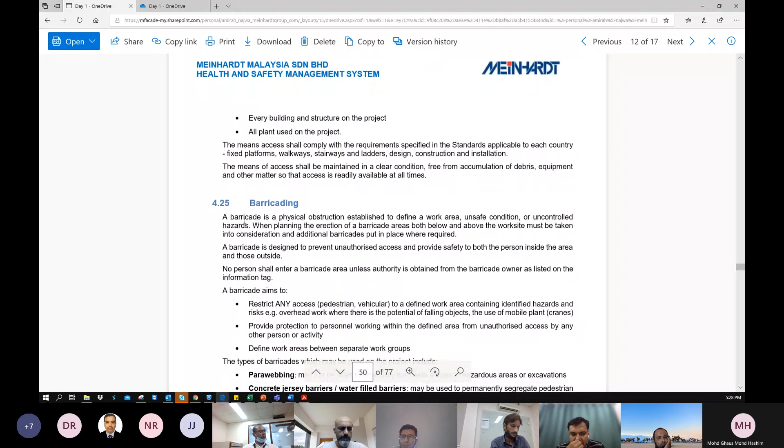Some important things to note. One important thing under the barricading requirement, we have a technical guidance. Maybe you can show this on the bulletin - what is the barricade requirement in Meinhardt?

We discourage use of caution tape. We only use hard barricades in Meinhardt projects. So we expect to see Meinhardt barricade standards followed based on the bulletin that we issued.

I believe we have actually copied the Pakistan team in the recent bulletin. Have you guys witnessed the document a bit? The barricading standards?

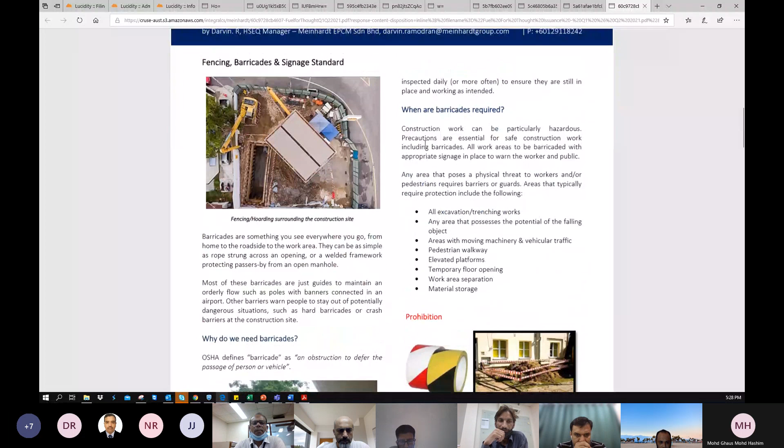I believe you are copied in the email, right, Abid? Yes. So this is the minimum requirement to manage barricades in Meinhardt sites, signages and standards.

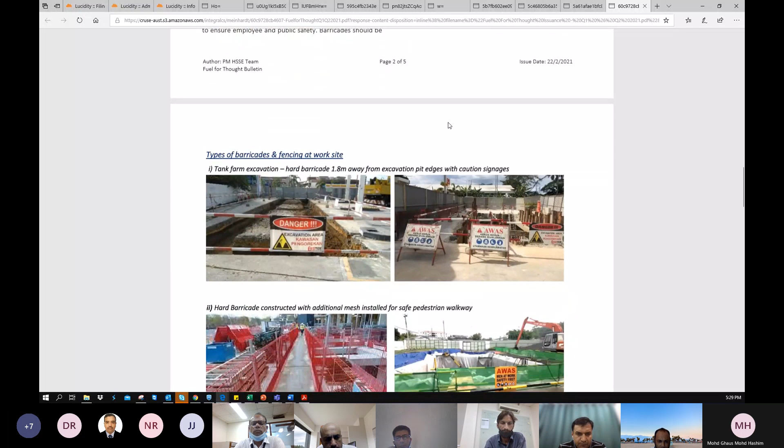So if you see, soft tapes are not allowed in Meinhardt projects, simply because it causes housekeeping issues later on, and this does not prevent unauthorized entry to the area.

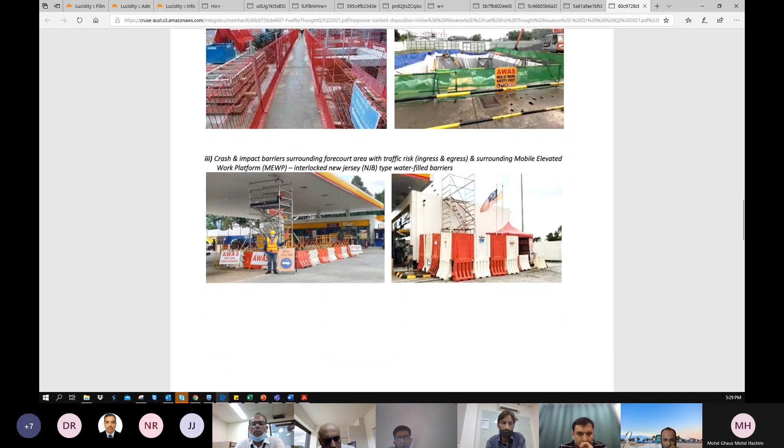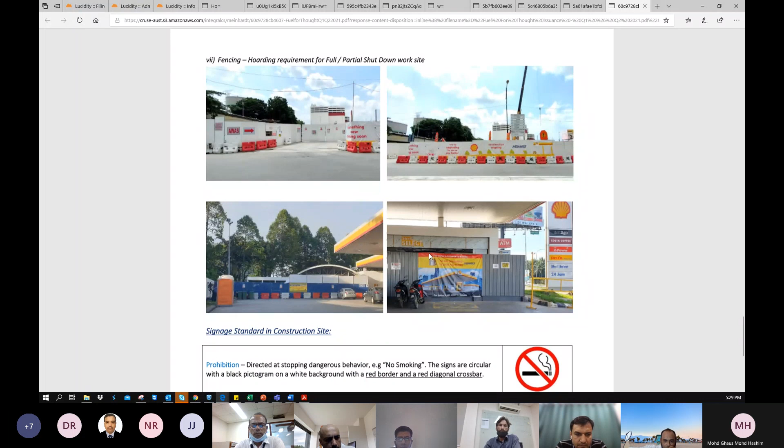The types of barricades cover various excavations, trenching, work area separation, pedestrian walkways, MEWPs (mobile elevated work platforms), crash barriers at ingress locations. In addition, we also have other signage requirements clearly and prominently posted in this standard.

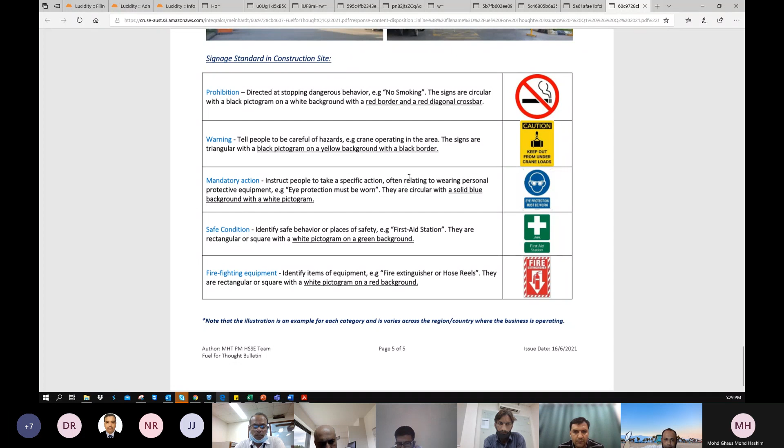So Abid and the team here, field engineers, please make sure these standards are applied in Pakistan. Yeah, sure.

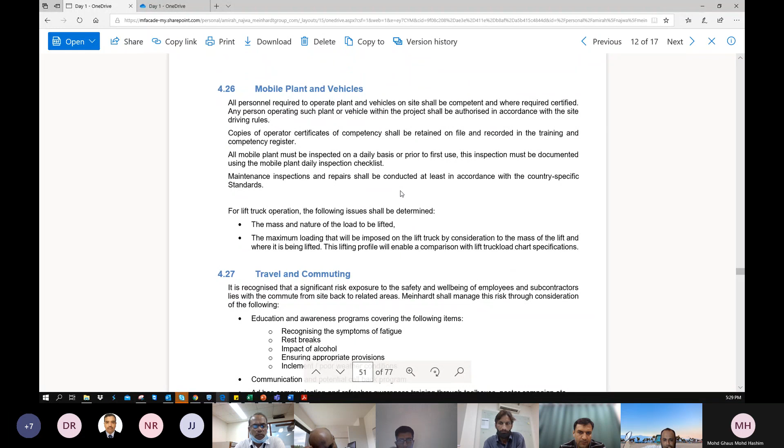All right, next will be mobile plant vehicles, travel and commuting. I won't be reading every line item here, just a quick high-level overview taking you through what is covered within our HSE management system. Can you scroll down quickly?

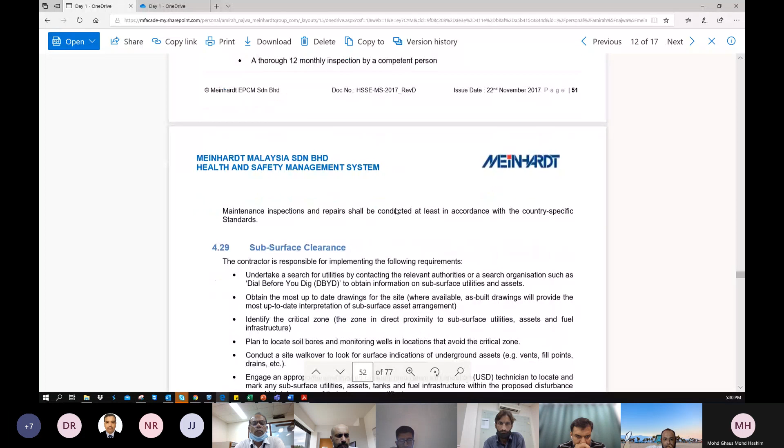Subsurface clearances before you do any excavations - you need to consider the dial-before-you-dig approach to make sure we don't contact any live utilities around. How do you do utility mapping? How do you do site survey? Type of manual excavation before you even bring in or mobilize heavy equipment to excavate, and so on.

There is also a standard method statement we developed in Malaysia - can you show it to them and upload it as a server document so they can use this to standardize in Pakistan as well? Actually, it falls under day 3, if I'm not mistaken, under excavation activity. Okay, cool, that will all be covered.

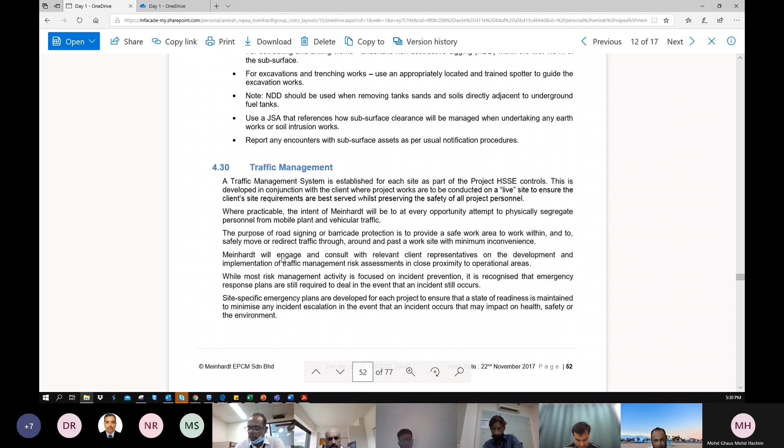We'll cover the work method statement and how we actually improved based on some learnings we had in Malaysia and Indonesia. All right, next we'll also cover traffic management in our projects.